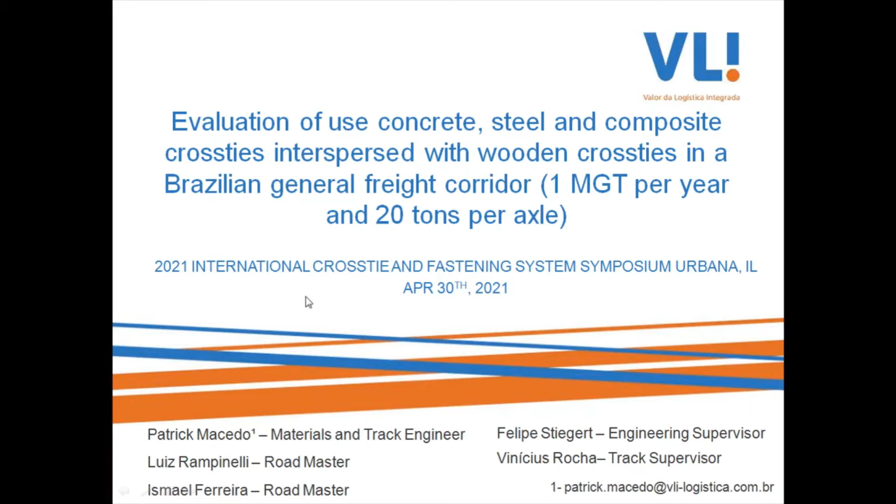First, I want to present VLI. VLI is a Brazilian railroad with more than 5,000 miles, and our key segments are agriculture products, steel industrial products, and manufacturing goods. It's a general freight railroad.

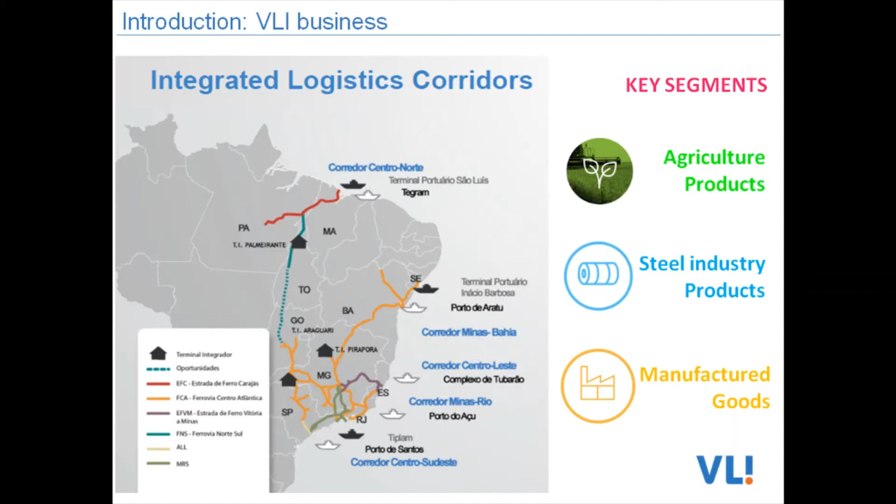Here we have a special corridor in VLI, the Minas-Bahia corridor. It's the biggest corridor of VLI, with 1,100 miles and 3 million wooden cross ties. It has low density, low annual tonnage, low operation speed. Our wooden cross ties here have only 5 years of useful life.

In this corridor it's a jointed track with a lot of rail joints. We have a backlog of sleepers and rail anchors, and also fouled ballast. This is the main parameter for this work, so it's a typical corridor in terms of maintenance. It's not good.

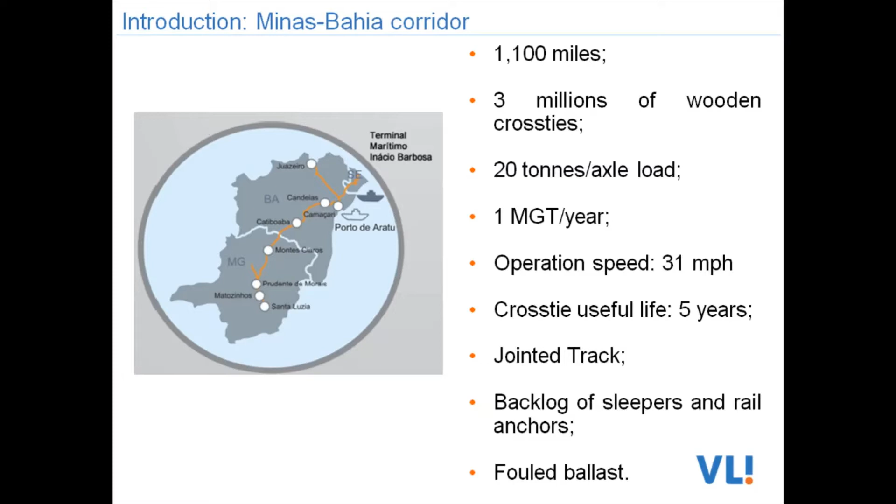In general, what are the motivations for interspersing wood with concrete or other material cross ties? It's economical issues, as we can see with Minas-Bahia. In general we also have geometric problems, especially widening gauge, so we need to solve the geometric problems quickly, and interspersing is maybe a good solution.

However, there are many studies that do not recommend this solution due to the incompatibility of stiffness between traditional concrete and wood. In general, it's necessary to use special concretes to equalize the difference in stiffness. So for traditional concrete, it's not good to intersperse in terms of literature.

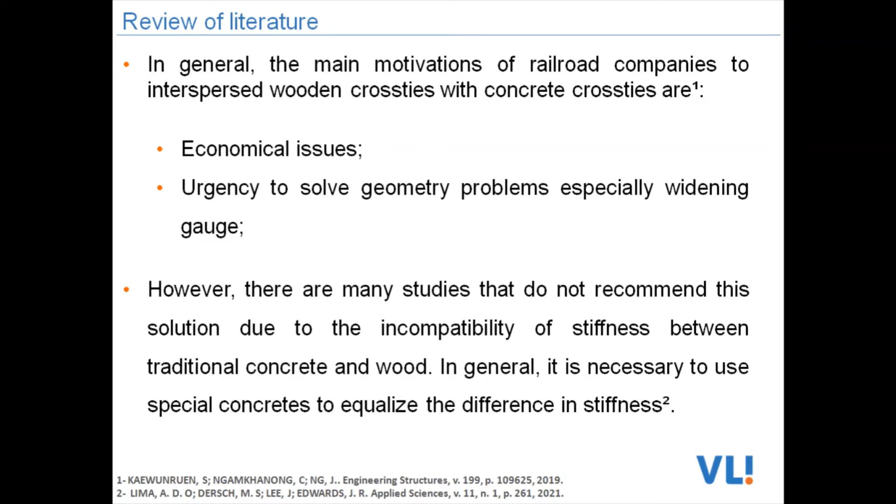But we tested it for studying our conditional operation. So the objective of this study was: can interspersing wooden cross ties with alternative cross ties be a viable technical solution for the Minas-Bahia corridor? For our case, is it possible to intersperse?

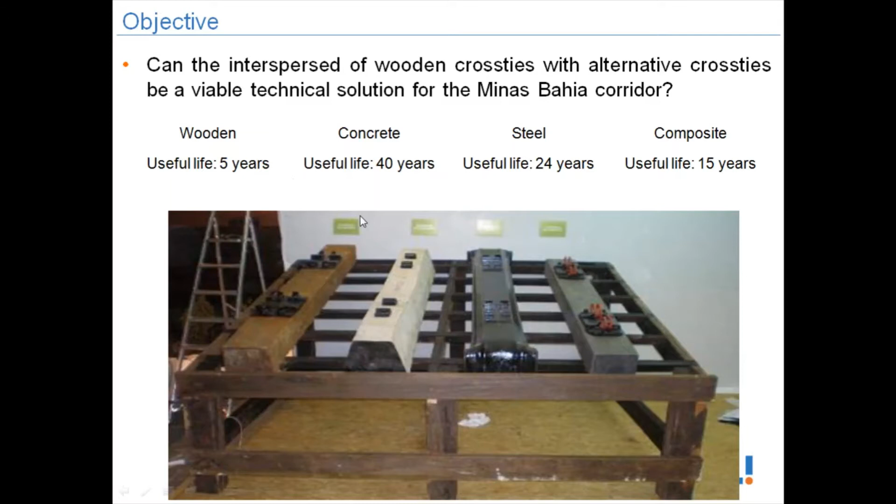As I said, we have only 5 years of useful life for wood, and for concrete we consider 40 years, 24 years for steel, and 15 years for composite. We interspersed with all of them for this study.

So the first curve, the concrete - here we can see we installed the concrete with one concrete for 2 wood. We developed a special structural project for the concrete with these parameters. It's a small concrete cross tie; the normal situation is the concrete is bigger than what we studied here in the Minas-Bahia corridor.

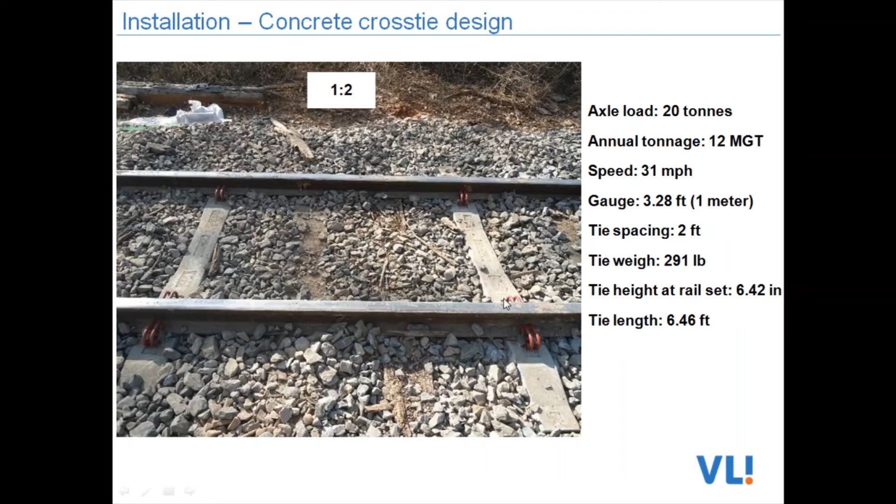We did the same for steel, curve 142. We used a special steel profile, smaller than the normal - a PR51 profile.

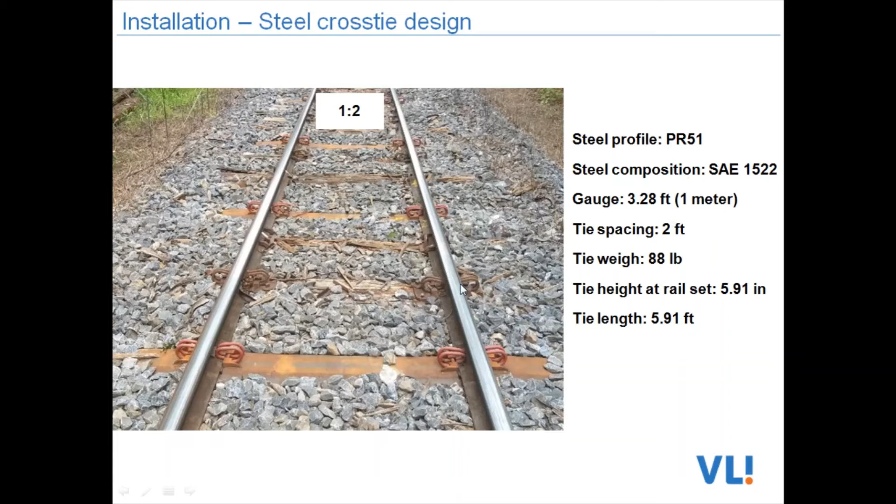Our gauge here in Brazil, in our railroad, is a metric gauge, 1 meter. And the same for composite cross ties, curve 142. Here in Brazil, our composite cross ties' matrix polymer is high density polyethylene, and the dimensions of the composite cross ties are the same as wood cross ties - height, length, the same dimensions.

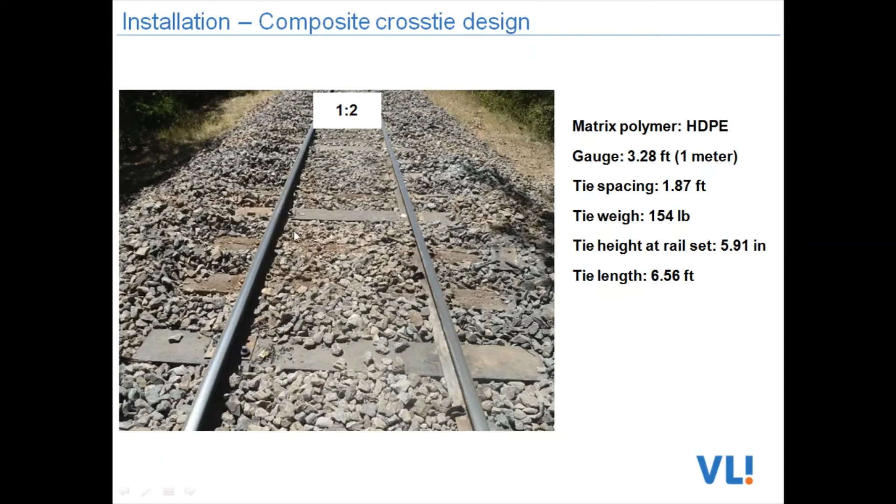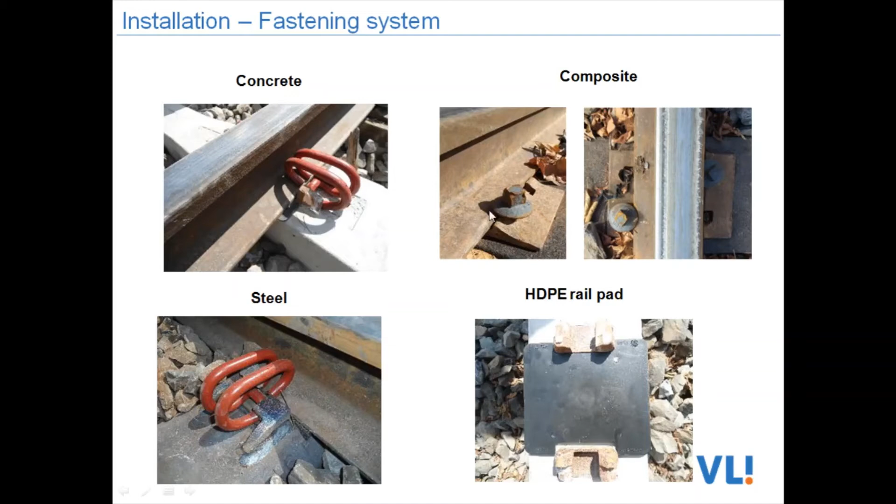For the fastening systems for concrete and steel, we used a Brazilian clip called Denic, with high density polyethylene rail pads, because this fastening system is cheaper in Brazil than others like Fast Clip or e-Clip. So we decided to use the cheaper option for the Minas-Bahia corridor. For composite, we use the same fastening system as wood cross ties - it's a tirefond with tie plate.

As I said, here in the Minas-Bahia corridor we have full ballast. We know that's not good, not recommended, but we wanted to test it in this situation - full ballast in all cases, for concrete, for steel, and for composite. Three curves.

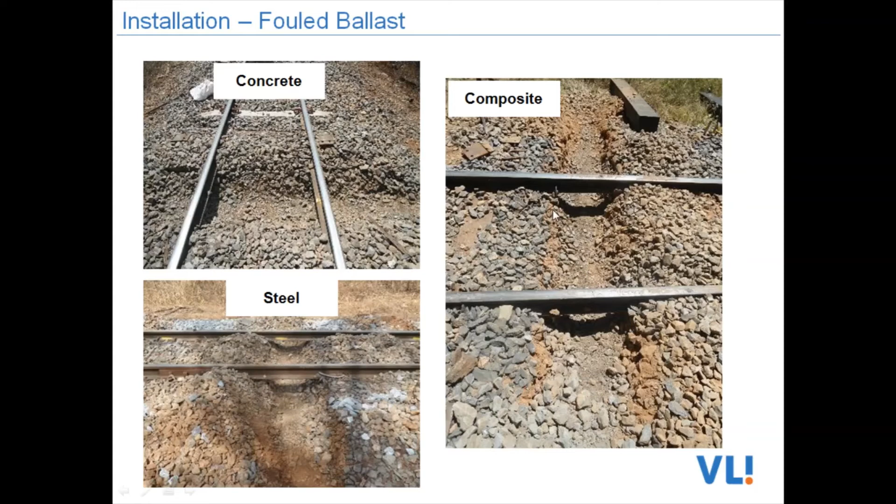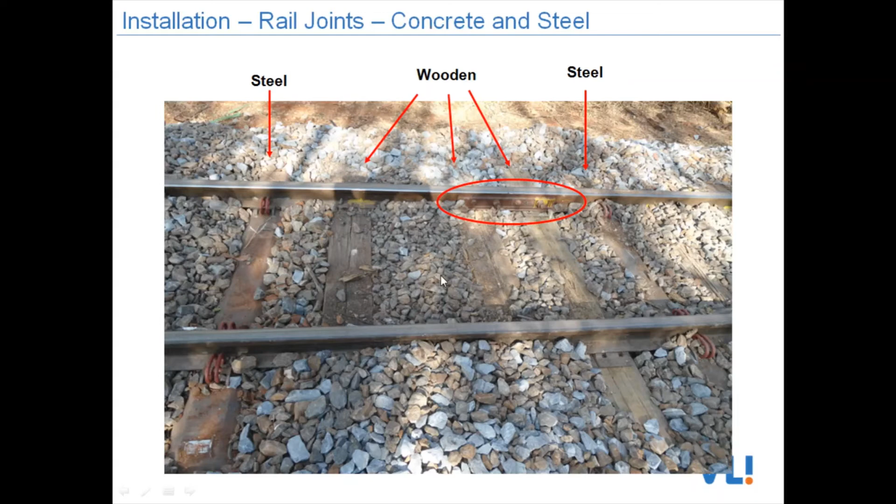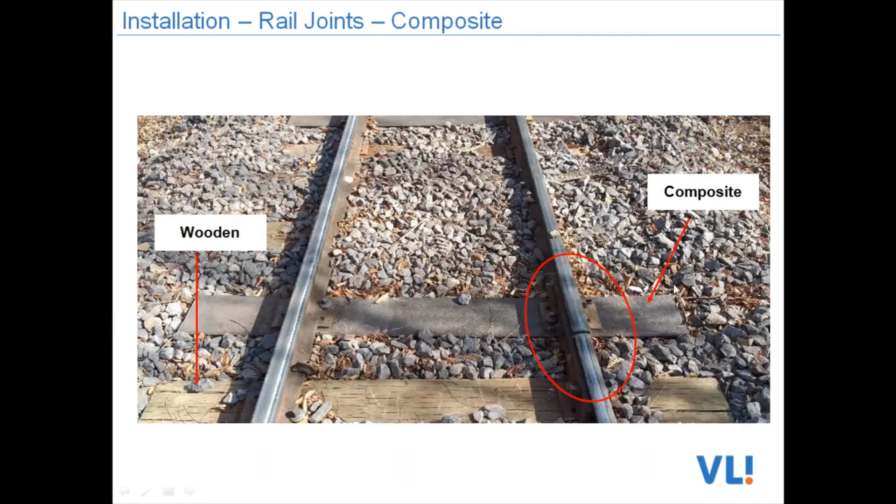Here's a special condition: in the rail joint regions, we removed the wood cross ties, because we know there are high elevated vertical loads there, and we decided to remove the wood in these regions for the concrete and steel curves. But for composite, we installed the composite ties in the rail joint regions - it's an advantage of composite, because in theory it has mechanical behavior similar to wood cross ties.

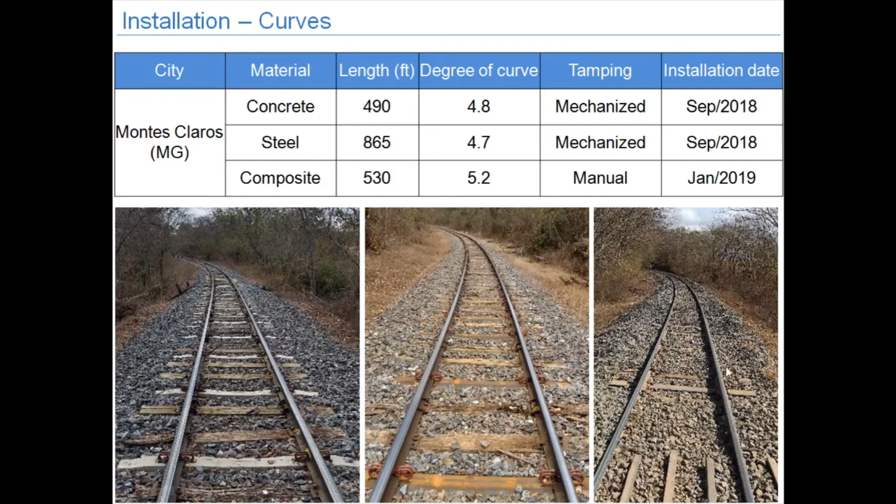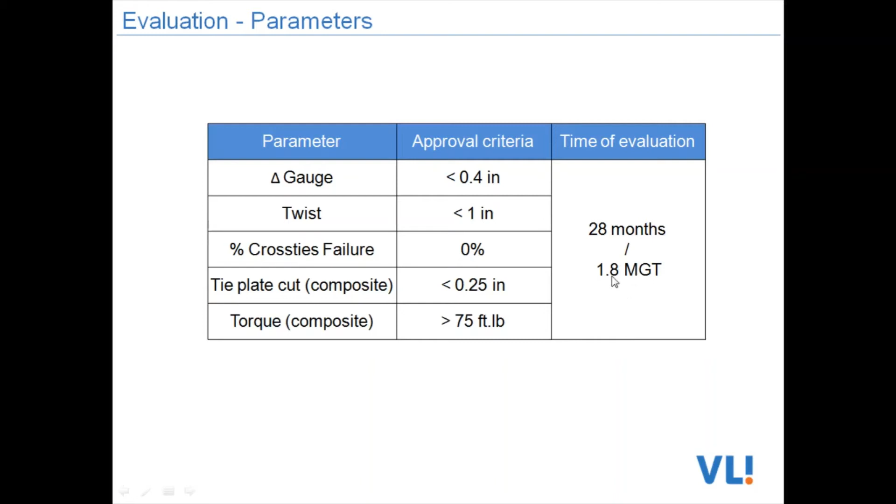So we evaluated these parameters: gauge, delta gauge, and twist, cross tie failure, tie plate cut, and the torque of tirefonds for composite. We monitored it for 28 months, 1.8 MGT for us, and let's see the results.

For the gauge, we measured it with a rail gauge ruler at 12 points, for inspections 1 through 6 along these 2 years. What we can see is the gauge on average remained stable, which is very good for us, and decreased a little in the last inspection. So that's a very good result.

The gauge needs to remain stable for good cross ties. The main feature of cross ties is maintaining the gauge. So the results for concrete proved to be very good.

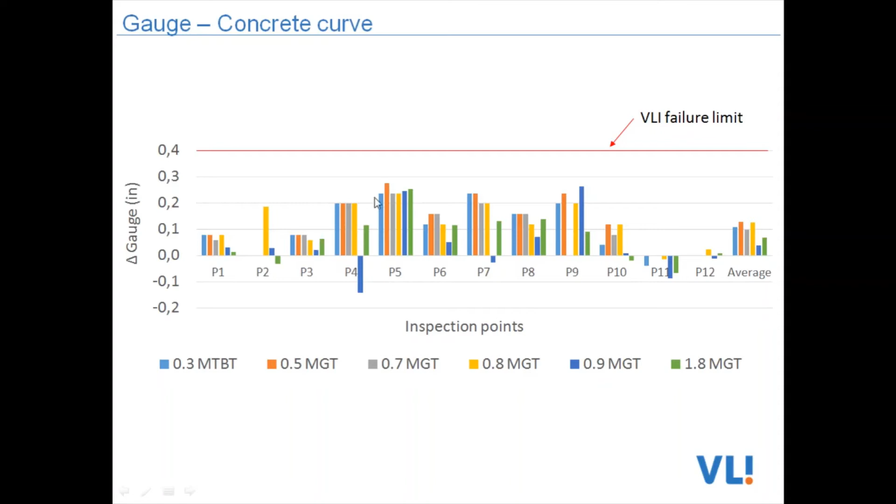For steel, the behavior was similar. The gauge remained stable for all the test period, so very good results for steel. That's our main objective for using concrete and steel, because the gauge is fixed, so that's very important for the railroad.

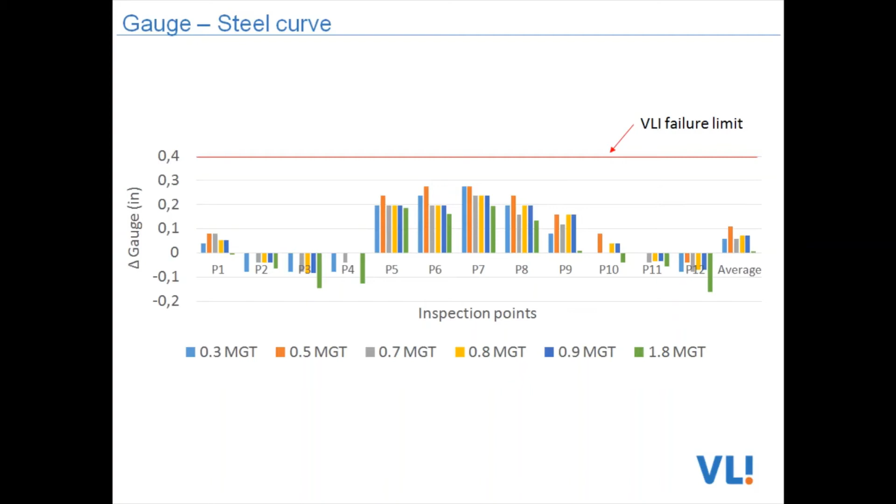For the composite curve, we can see the same result. Actually, the gauge decreased, but it's a false result because we have one limitation: the rail has a mechanical deformation, so the gauge appears to decrease, but that's because of the mechanical deformation of the rail. In general, we can conclude that the gauge stayed the same during all the periods.

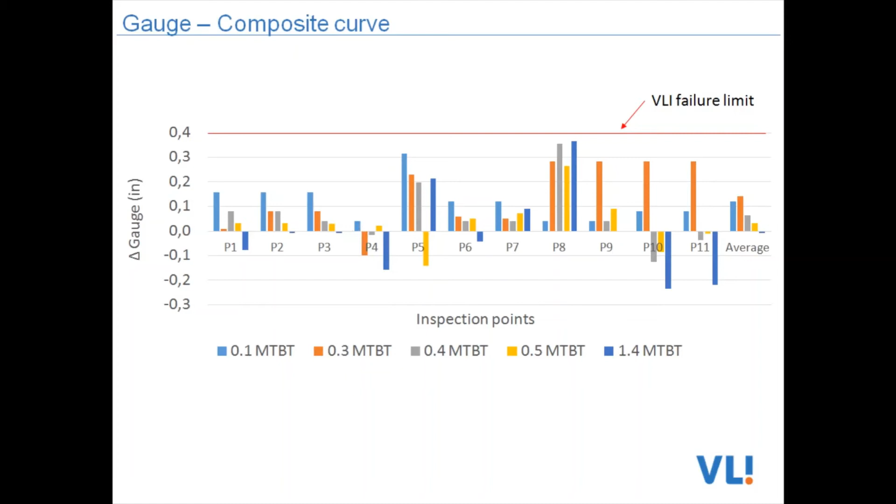So very good results for composite. All alternative cross ties have good results. Excellent for us.

For twist, before the installation the concrete curve had defects, and after the installation the defects continued, even through the tamping process.

We conclude that these are chronic problems of this curve, and the concrete doesn't increase the problems. Actually, in the last inspection the number of defect points is lesser than the others, so the concrete doesn't increase the defects here.

We can see the value is a short defect, not so bad for us, so far from our limit, especially in the last inspection.

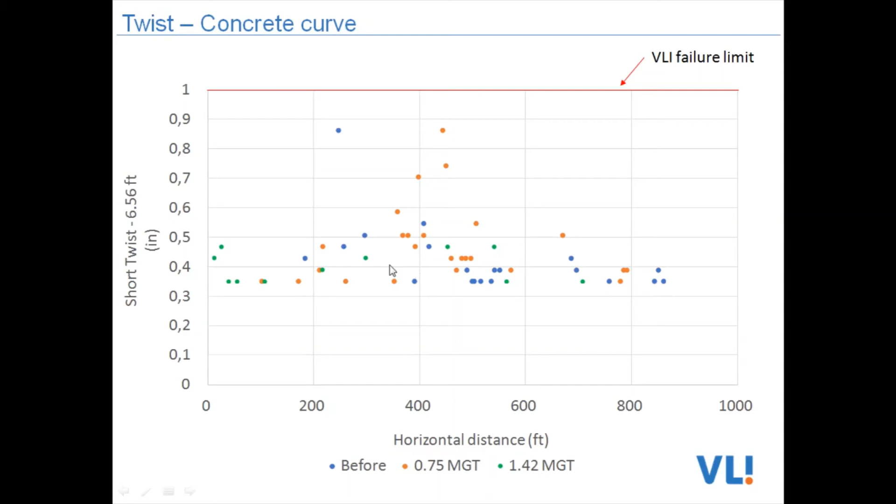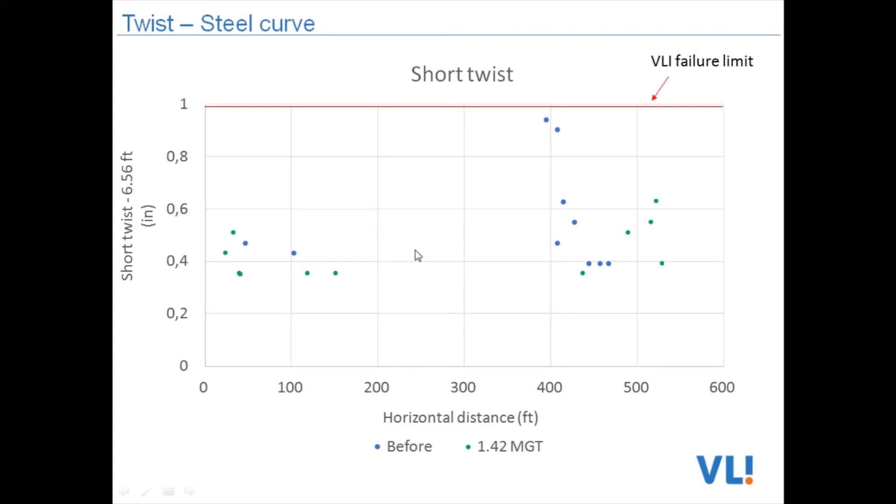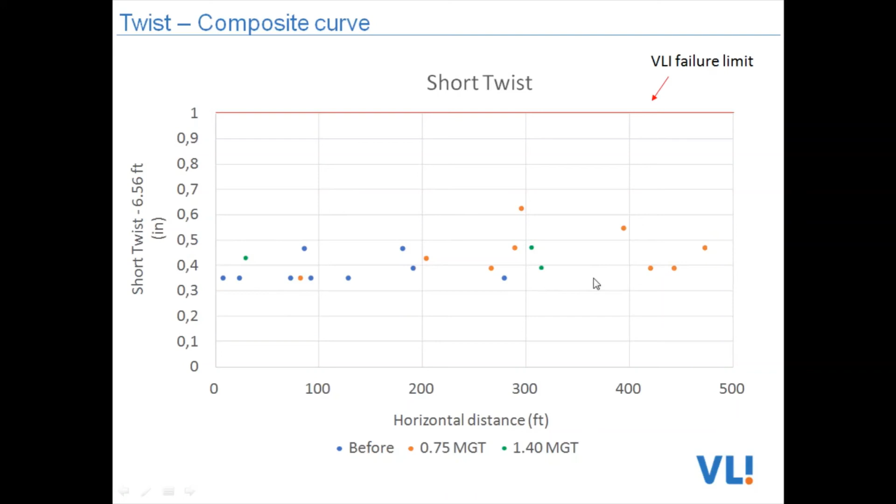The similar behavior for steel: here we can see for the last inspection smaller points, and the same conclusion for steel, and for composite also. Here we have chronic problems with twist, and the alternative cross ties don't increase or decrease these problems. Very good.

In the visual inspection, you can see the concrete doesn't crack. We have 0% failure in concrete. Very good results, the curve was very good, so good results for concrete here. Our last inspection was 1.8 MGT.

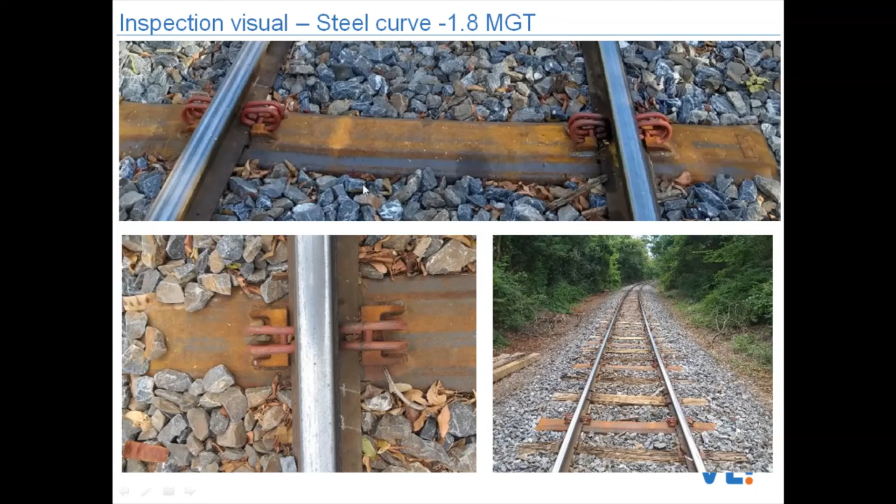The same for steel, 0% failure, excellent results as we wanted. But we have some points of attention, because our wood now has a high elevated deterioration, decay.

So we know the vertical loads increase here for the concrete and steel cross ties, so we will need to monitor this situation. We are thinking of doing field instrumentation to measure this force and the bending moment in these cross ties.

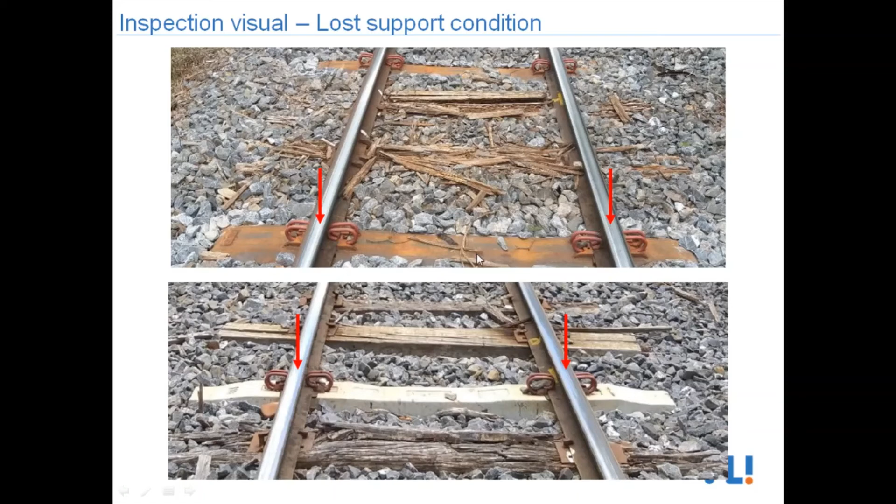So we need to develop a better project with other material, maybe study what's the best rail pad for this situation. As I said, we chose the cheaper material, so maybe now we have to choose other material to solve this problem.

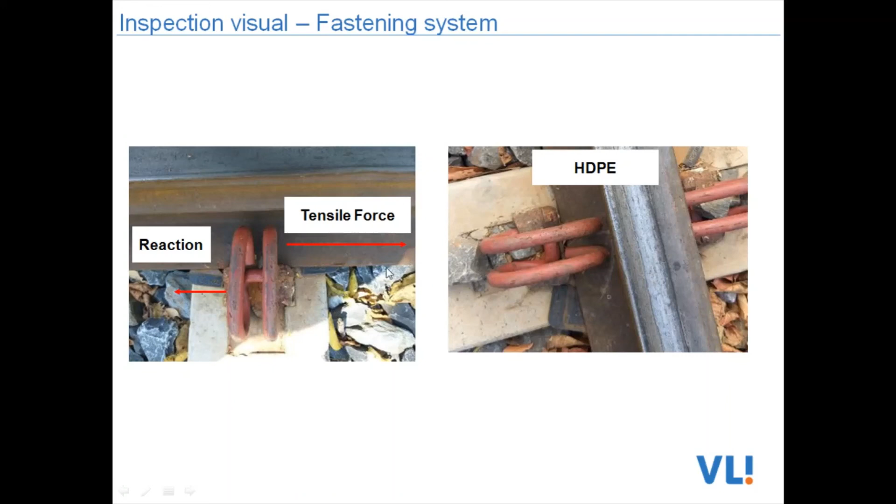For composite, perfect results without cracking, 0% of failure for concrete, for the cross ties, and for the fastening system.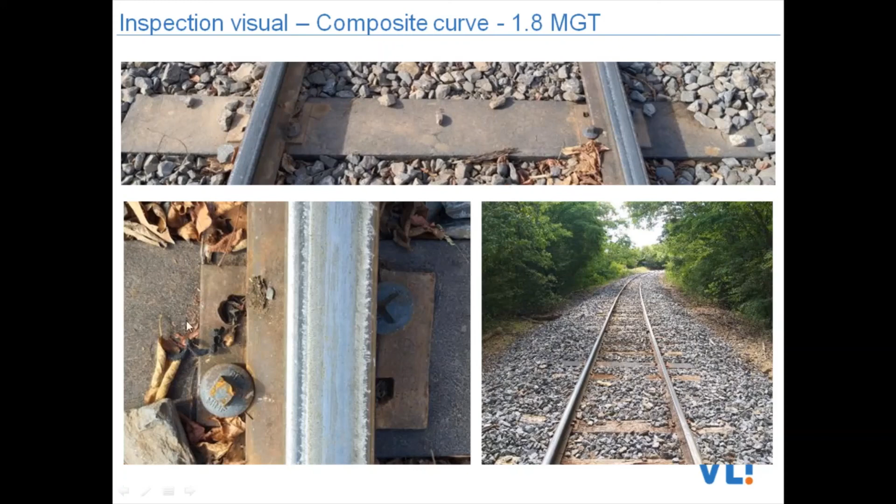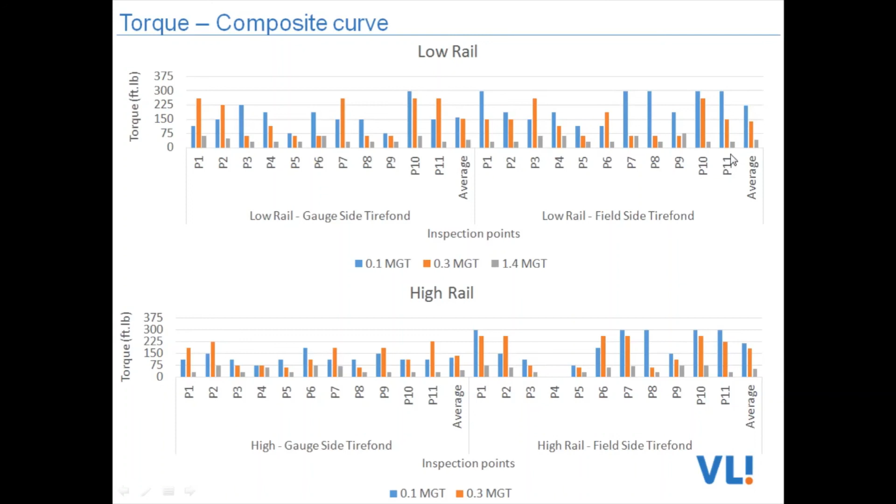But we monitored the torque, and we can see here we monitored 11 points on the high rail and low rail, and on average, as we can see, the torque decreased. So it's important that we solve this problem.

In the field we can see the problem: the uplift of the tirefonds, so we don't have torque here in this tirefond. So we need to retire this tirefond.

Maybe the cycle of retirement will be 1.4 MGT.

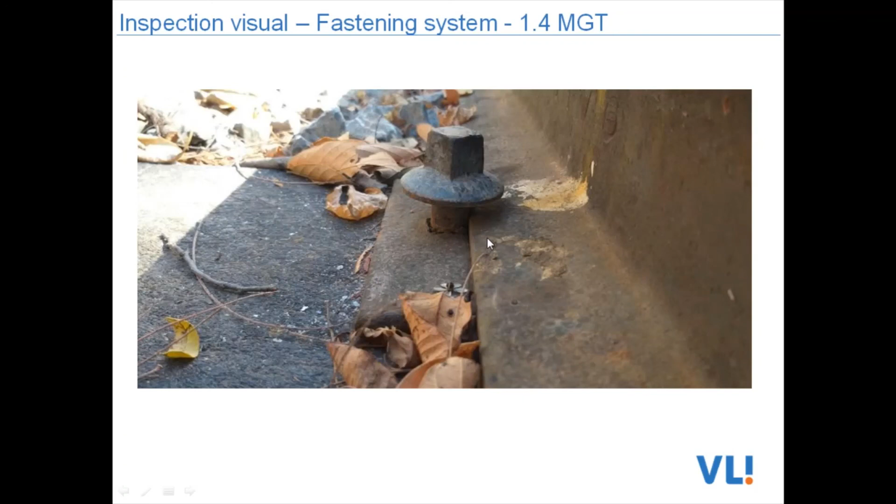And that's it, our conclusions for now: the performance of all types of sleepers was considered satisfactory until the last inspections. The failure rate was 0%, even in fouled ballast, and 10% with highly deteriorated wooden cross ties. That's a very good result so far.

We will need to continue monitoring the curves and the cross ties to study the solution for the Minas-Bahia corridor. We will do field instrumentation to check the increase of vertical load and bending moment at these cross ties, do the intercalation with highly deteriorated wooden cross ties, and also develop a new project for rail pads with other materials and designs.